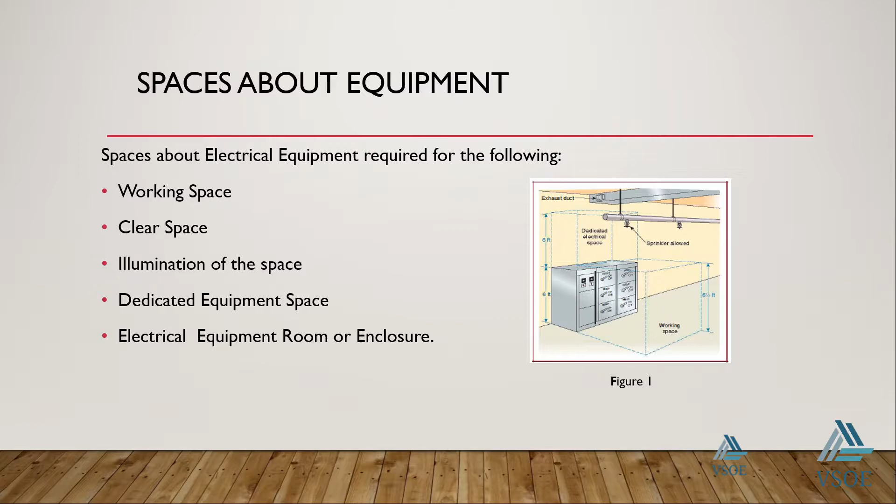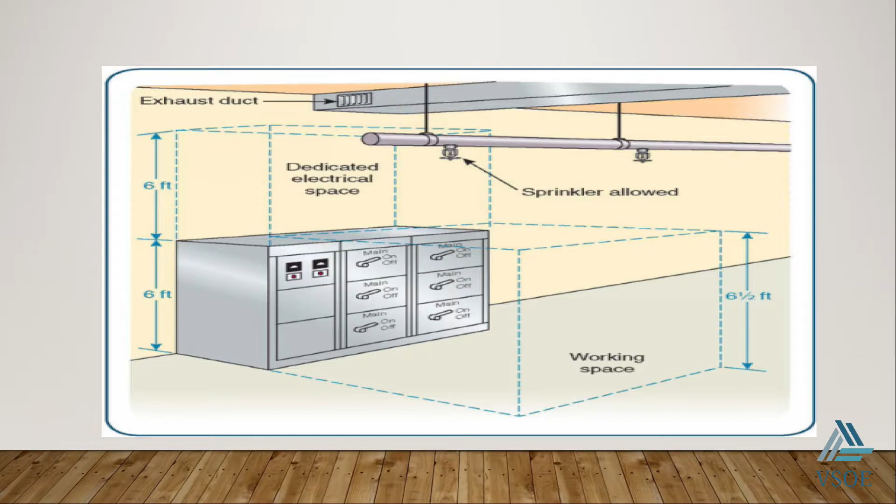So the working space. The working space is that space outside where the equipment is laid down, right? That is what we refer to as our safe space. The intention is to protect personnel who work in the vicinity of the equipment without jeopardizing safety. Why should we maintain working space?

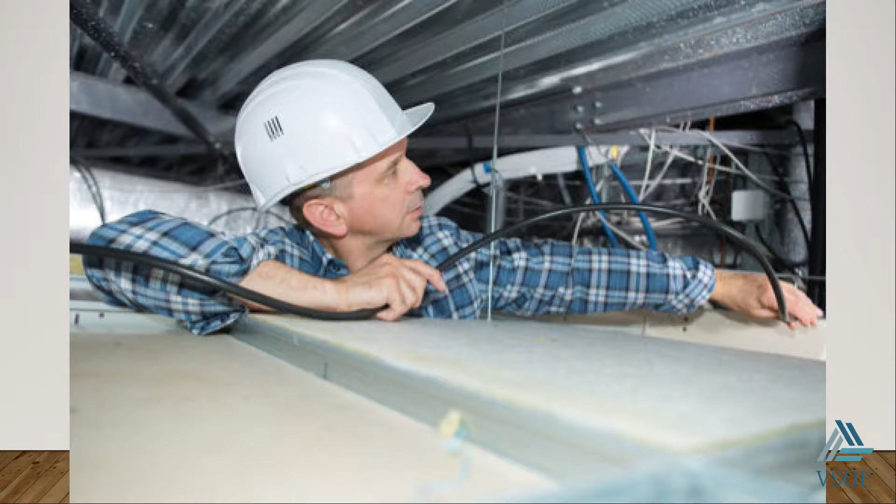Now, equipment operating at 600 volts or less to ground is likely to require examination, servicing, and maintenance. Examples of equipment that need examination and servicing are panelboards, switchboards, circuit breakers, controls, and heating and air conditioning equipment. So there should be safe space to carry out maintenance work on this equipment.

Now, the dimension of the working space. This dimension shall comply with 110.26(A)(1), (A)(2), and (A)(3). We refer to these as the depth of working space, the height of the working space, and the width of the working space. Particular attention must be paid when it comes to the dimension of working space.

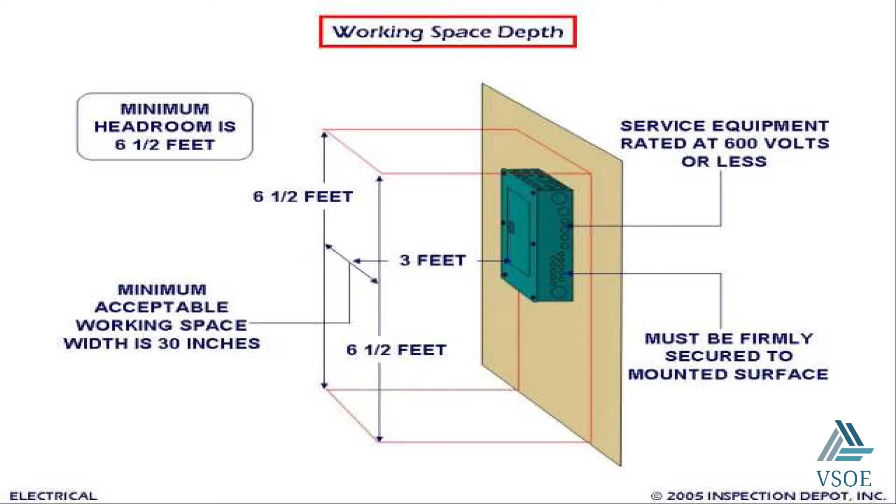How much space is required to maintain? The depth of the working space shall be maintained in the direction of the live parts or the enclosure of the live parts. Per Table 110.26, the minimum clearance we're supposed to maintain for 0 to 150 volts under conditions 1 and 2 is 3 feet and 3 feet respectively.

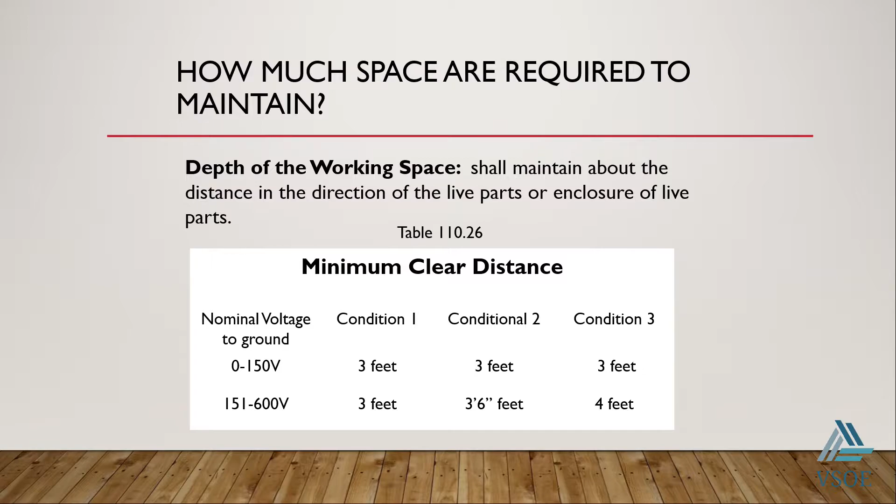And the minimum clearance we should maintain for 151 volts to 600 volts is 3 feet under condition 1, 3.5 feet under condition 2, and 4 feet under condition 3. Condition 1 represents exposed live parts on one side of the working space within 3 feet, right? That is when the voltage level is 0 to 150 volts or 151 volts to 600 volts. So for condition 1, we should maintain a depth of 3 feet at these voltage levels.

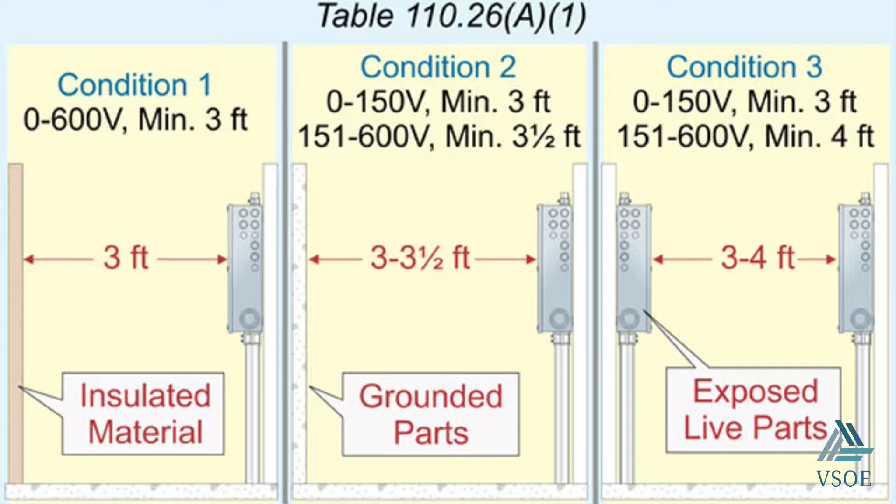For condition 2, where there's an exposed or live part on one side of the working space and a grounded part on the other side of the working space within 3 feet, the voltage level would be 0 to 150 volts and 151 volts to 600 volts. At this level, we said the minimum clearance should be 3.5 feet.

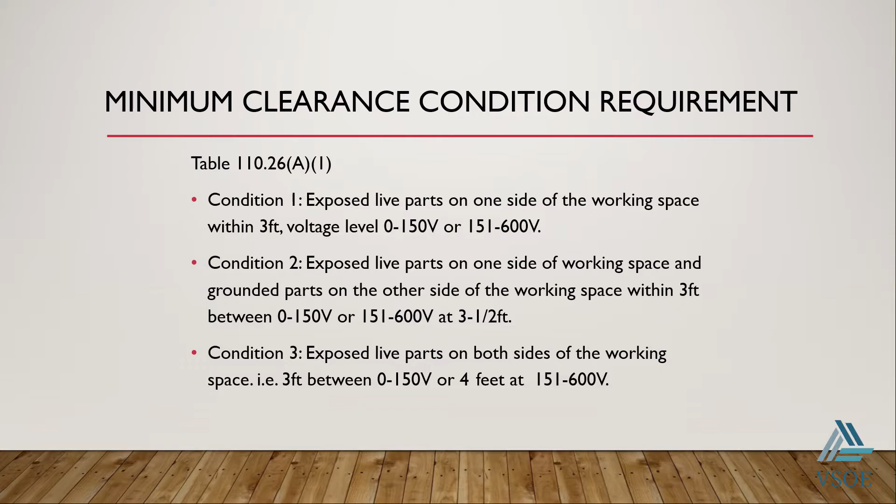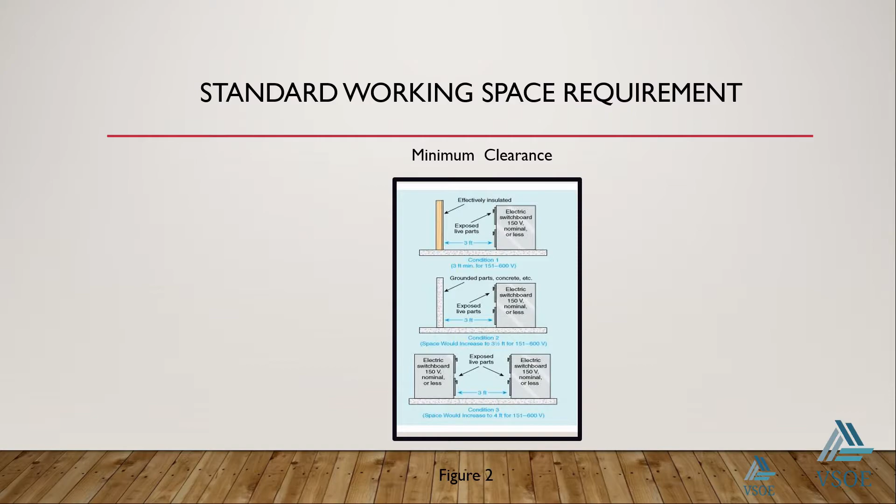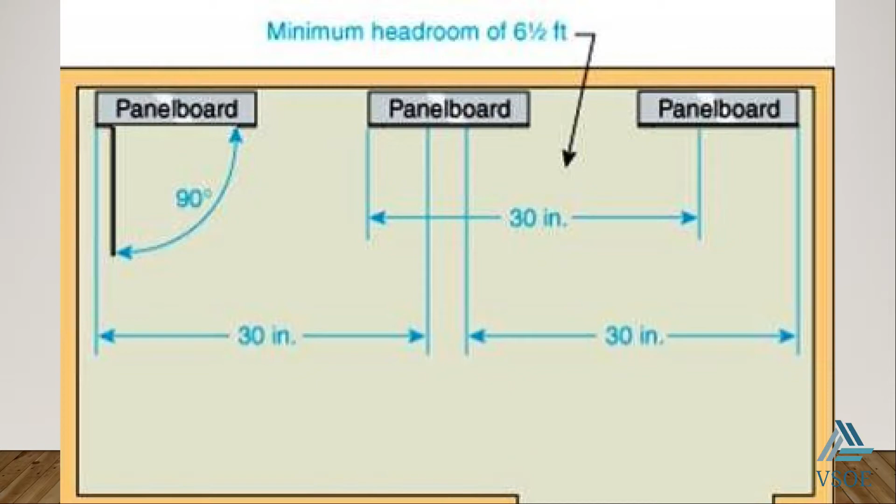The width of the working space is the space required in front of the equipment so as to allow personnel to operate on the equipment without any hindrance. So the width of the working space shall be the width of the equipment or 30 inches minimum, whichever is greater. The working space shall permit a 90-degree opening of the equipment door or hinged panel.

The height of the working space represents the area in which the work is being performed. The working space shall be clear and extend from the floor or platform to a height of 6.5 feet, or the height of the equipment, whichever is greater.

Equipment within the height requirement located above or below the equipment must not extend more than 6 inches beyond the front of the equipment. So any such equipment located on top of or below the equipment that is going to be worked on should not extend beyond 6 inches to create an obstruction.

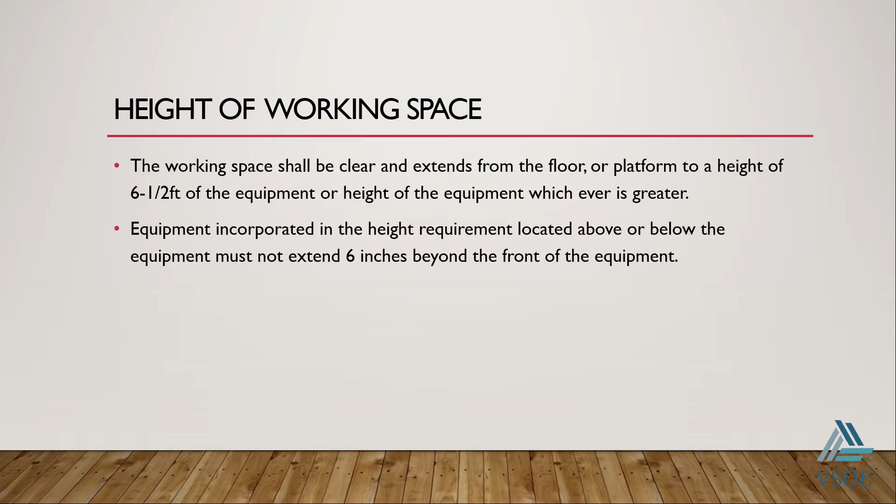Where may working space not be required? Working space is required for the safe operation of equipment. However, in a case where there is a low voltage source, perhaps a smaller working space is required. And so equipment operating at 30 volts, 42 volts, and 60 volts may require smaller spaces.

And where there's a dead front assembly, it perhaps does not need any form of space to work. Therefore, non-energized assembly, such as the back or the side of the assembly, does not need working space. And in this case, an equipment can push through a wall or push against another equipment, since there is no space required on that assembly.

Now, where rear access is required for non-electrical maintenance, there should be at least a 30 inches minimum working space that should be maintained. And so in some cases, we may need working space, while in other cases, we may not. So special assessment must be done for your equipment when you're positioning it, since there might be no working space or working space for that equipment.

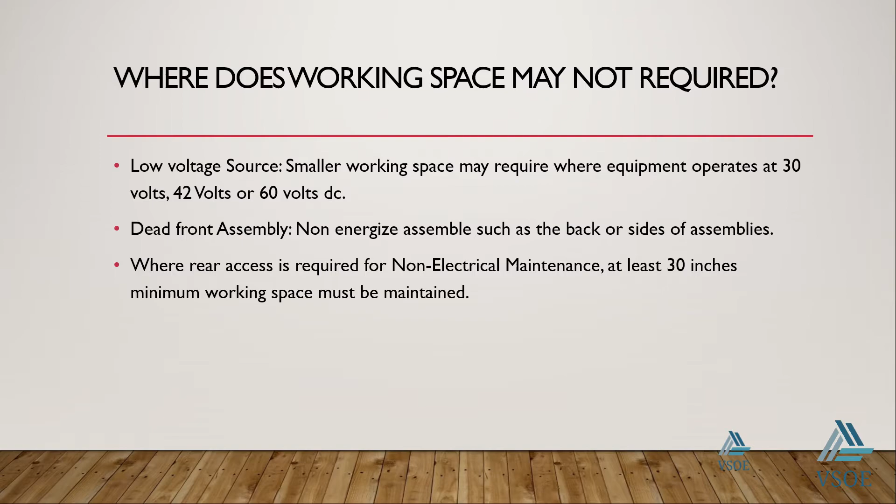Next one we're going to look at for working space is clear space. Now you have a working space, you need clear space, right? So you must not have any form of storage within a working space, so a person performing electrical maintenance can easily carry out their work without any form of obstruction. So you must not have any form of obstruction in such space. In an event where equipment are subjected to inspection, servicing, and maintenance, clear space must be maintained.

So it is very important that personnel who are not operating on equipment or who are operating within the vicinity of electrical equipment respect the rule that no storage must be left in the working space for which those equipment would have required maintenance.

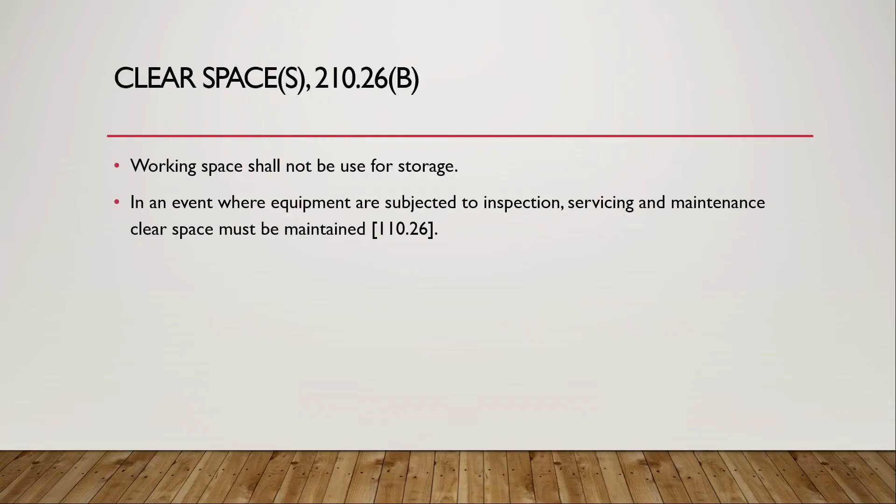So entrance and egress from working space. At least a minimum of one entrance and egress point should be established for working space about electrical equipment. And this is to provide maintenance and inspection on that equipment. Now for large equipment, 1200 ampere or more, 6 feet wide, that contain overcurrent devices, switching or control devices, shall maintain entrances and egress on both ends, 6.5 feet high or 24 inches wide.

In the case where it's a large equipment, it is acceptable to have a single entrance and egress from the required working space, so long as there's extra working space about the equipment.

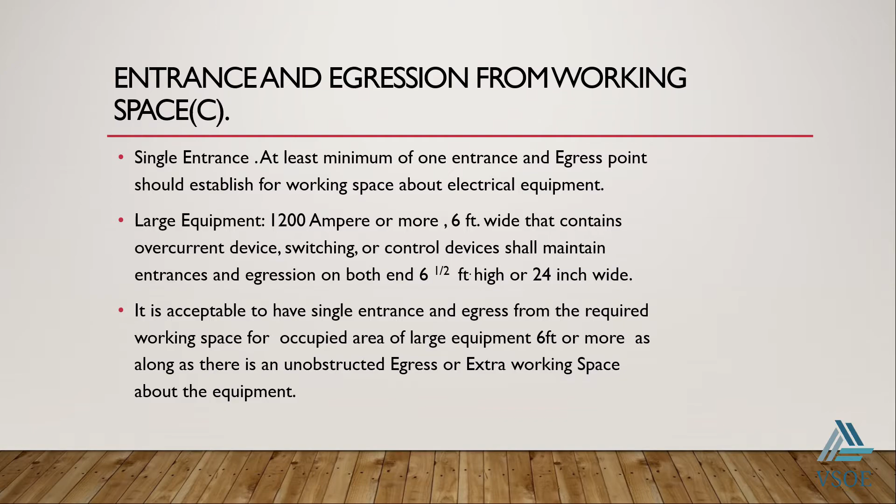When we consider equipment space, we look at it from the perspective that the equipment should be able to fit in that space. And so that equipment requires adequate space so that there's no obstruction and no damage can be done to that equipment. So for outdoor installation, it shall comply with 110.26 E, A, and B where equipment installation is concerned.

Now, installation requirement. Outdoor electrical equipment shall be installed in a suitable enclosure and shall be protected from accidental contact from unauthorized personnel. So a dedicated equipment space should be available, and such space should occupy the width of the equipment and the depth of the equipment, and the space should be available from the grade to the height of the equipment, and no obstruction should be within that space in which the equipment is going to lay.

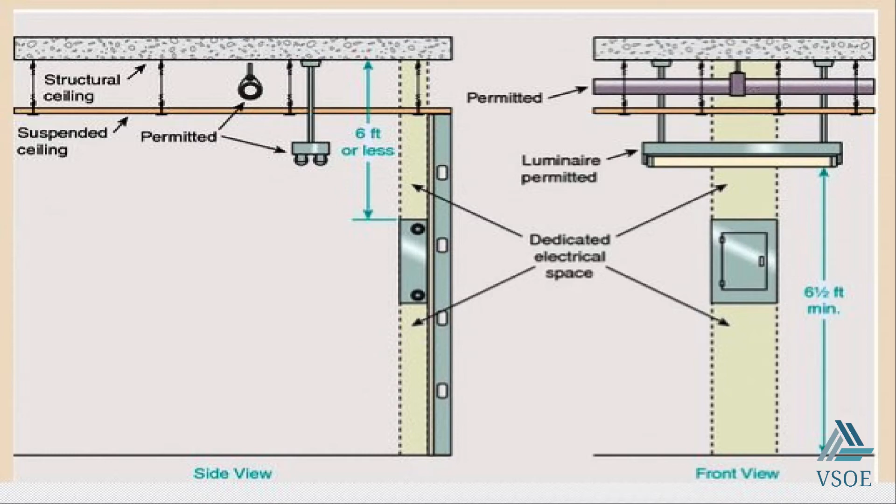When it comes to electrical equipment rooms or enclosures, it is very important that only authorized personnel are allowed to have access to those equipment. Therefore, equipment enclosures and rooms are required to be locked to prevent unauthorized access, that is from persons who are not going to perform maintenance, service or inspection on those equipment. Such rooms or enclosures housing electrical apparatus are considered to be accessible if qualified personnel have access to those equipment.

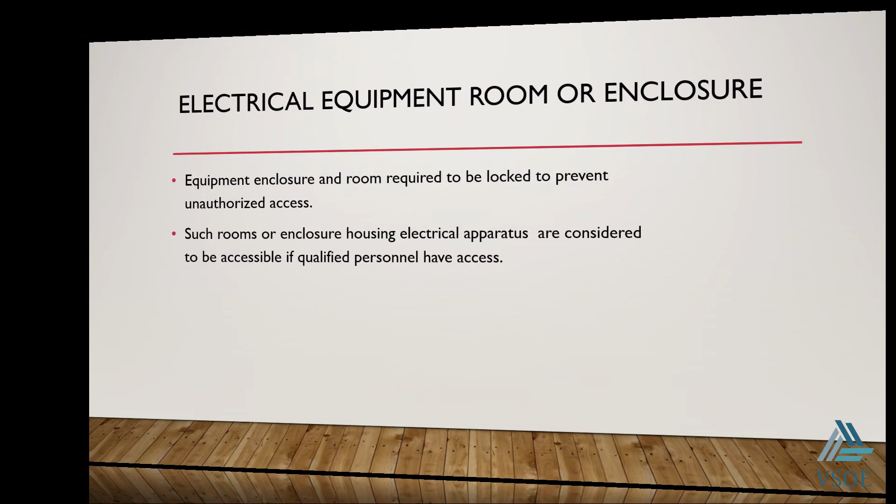It is so important that we ensure that the space in which work is going to take place is properly illuminated. And so we try to install lighting fixtures in the area to provide enough coverage for lighting. So illumination shall be provided for all working spaces about service equipment. That includes switchboards, switchgear, panelboards, or motor control centers. Additional lighting shall not be required where the workspace is illuminated by adjacent lighting.

Therefore, if you're going to lay out one equipment beside another equipment that is already illuminated, then you don't need additional lighting. So illumination shall be provided in the working space, and if there's already illumination in that space, then you don't need any additional illumination. So that just takes care of that new equipment being installed.